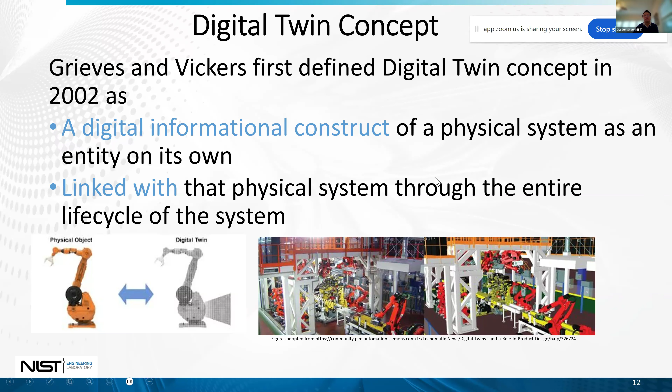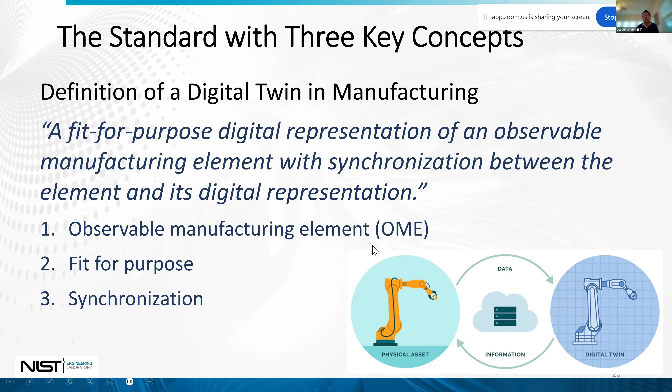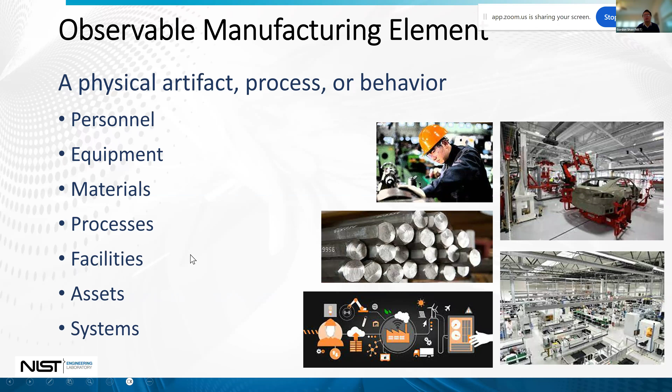The standard has three key concepts. We've seen the definition, we're not going to repeat it, but the three key concepts include observable manufacturing element (OME), fit for purpose, and synchronization. The OME is really like any physical artifact, process, or behavior on the shop floor. It could be personnel, equipment, materials, processes, and so on - anything you want to model or you can model.

Fit for purpose is a very important concept because each digital twin should have its own objectives. It's context dependent, only needing relevant data and models. Normally when we think about digital twin, we were told that digital twin is a complete digital replica or mirror or copy of the physical thing. So you would think, okay...

...you should model everything if you're talking about the digital twin. Is it possible or even necessary to model a human being, for example? How can you model a human being from inside out completely as a digital twin? It's not possible, right? But you can have multiple human digital twins depending on the different purpose of the twin. Like, you can have a fashion designer who just cares about the look of the human, the size, or you can have a health digital twin, only monitoring certain indicators, like blood pressure monitoring. But once you achieve that goal or objective of the twin, then your twin is a good one. You don't have to have something very complex that covers everything but nothing works.

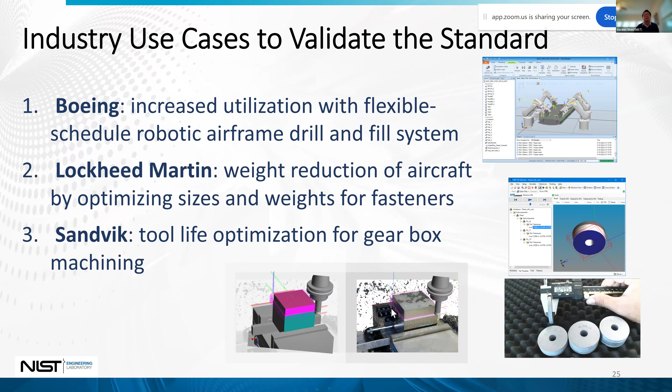So this is for use case number one, flexible schedule for robot drill and fill. They used to have a manual process with huge machines, everything operated by humans, a static, non-optimal process. Now they have a digital twin-based automatic robot cell with a dynamic and optimal process.

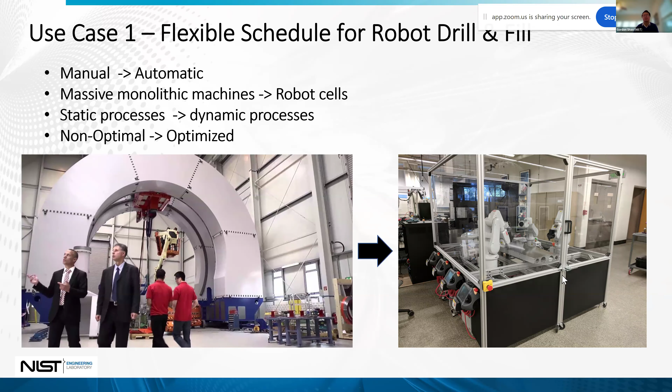They normally have this big aerospace structure, and oftentimes more than 1,000 holes and fasteners need to be done. When the part comes in, it has different conditions of assembly, meaning some holes are already drilled somewhere else, and other holes may not need to be drilled until some later time. Everything needs to be tracked, recorded, and digitized. Think about a human doing all this—it's very tedious and easy to mix something up.

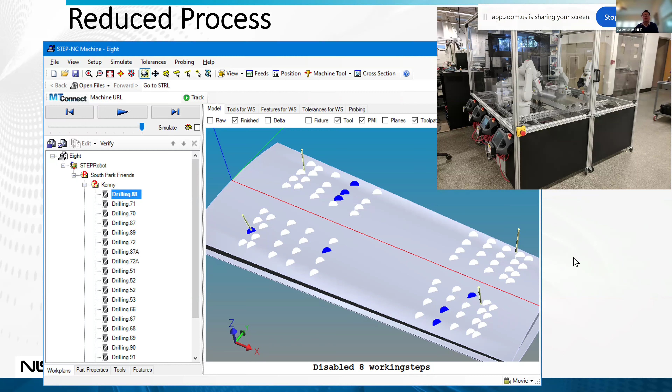Like I said, digital twin just started not long ago, a few years ago, and standard development requires a few years. Until now, not many digital twin specific standards have been completed and published, even though many are still in the pipeline. But we can leverage—like I said, even one single digital twin involves many different aspects—we can leverage existing standards for data collection, data security, information modeling, and so on.

Some examples of existing standards, including some that have been used in the use cases: the STEP standard for design, MTConnect for real-time operational status, QIF for quality representation, and OPC-UA for communication, UML, SysML, AutomationML, and CMSD.

CMSD is the Core Manufacturing Simulation Data—that's an information model representing simulation modeling. I think I'm going to skip those.

This is just, in my project we have a digital twin lab. I have some equipment including a CNC machine, a CMM, and a robot arm. We have the options to formulate different kinds of scenarios, to test different kinds of standards, identify issues, report back, and develop digital twin prototypes.

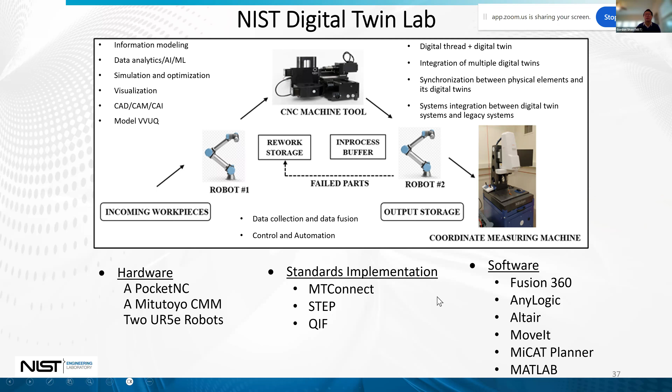Those are some work we did last summer.